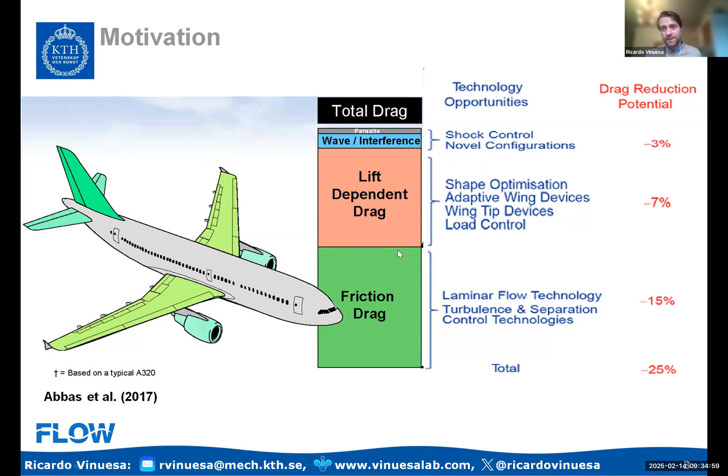And I also wanted to show some of the stuff that we do within AI for Science. We have a review paper now under review in Nature Computational Science, where we are trying to see how AI can be used for scientific discovery. And the take that we took in this review paper, Steve Brunton is also part of it, and many other authors worldwide, is basically to classify the applications by how much we know about the governing equations.

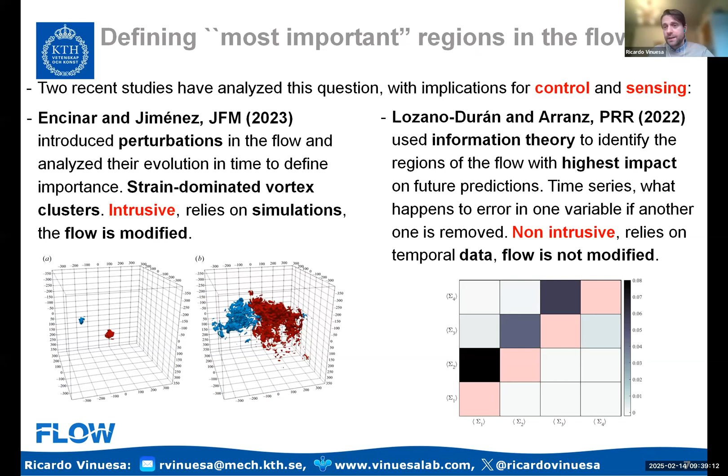What we want to talk about here is an alternative approach, which is based on deep learning. And this is intrusive on the surrogate model. We can really create a surrogate model and make our changes there such that we are not affecting the original trajectory. And one advantage of this is that it can also be applied to environments with limited data like experiments.

So we're going to start by analyzing a turbulent channel flow at a low Reynolds number. We're going to identify Reynolds stresses, so basically the Q events. These are regions, three-dimensional regions satisfying this equation, which means that the instantaneous product of the uv fluctuations needs to be larger than some threshold times the RMS of u times the RMS of v. Okay, so we basically want to look at volumes where the Reynolds shear stress is high, and that's the idea.

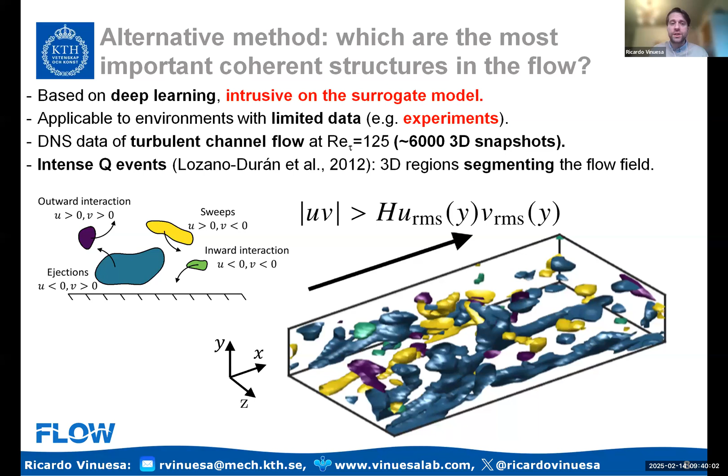And we want to classify this in terms of importance. So we want to look at if we build a predictive model, which can be a U-Net, for example. So with a U-Net, we can have the present state of the flow, which is given by the three-dimensional u, v, and w fluctuations. And then we can use this to integrate that in time and move it 5, 10 viscous times into the future.

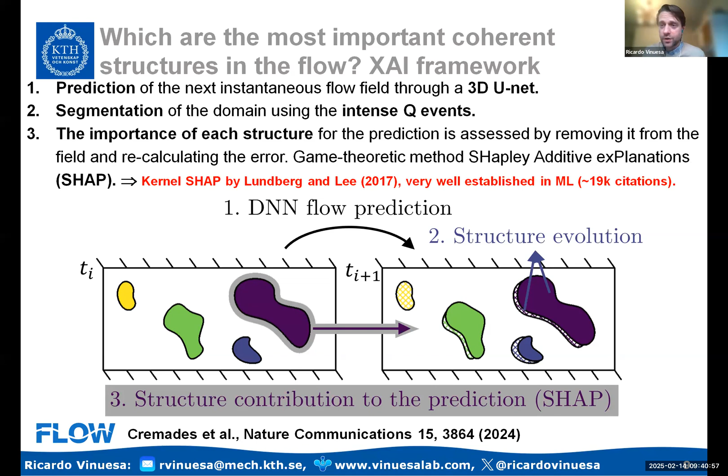Then using Shapley additive explanations, the SHAP framework, which is a game theoretic method, we can basically remove structures from the input, repeat the predictions, and see how that's affecting my error. And in this way, we can get a pretty objective way to measure the importance of each of those elements. This is work led by Andrés Cremades in my group. It was published last year in Nature Communications. You can find all the data and all the code available online.

So basically, if I go in a bit more detail, what I would do is that I have my present flow field, so the present instantaneous fluctuations. I use my U-Net to predict the future state of the flow. I have my prediction. I can compare that with the ground truth, which is the DNS, and I calculate my error. And the errors are very low. I mean, we have now models that give us less than 1%.

Then I go back to the input, I remove a structure, one of these Q events, and that removal is basically replacing by zero fluctuations, which is a non-informative field. I run my U-Net again, and I get a new predicted field, which I can compare with my ground truth, and the error will change. So naturally, some structures will affect that error more than others.

And in this way, we can create what is called a ranking of importance. Each of the structures will have an importance score, and this importance score is what we call the SHAP value. Okay, so this is how we can classify the different structures in terms of importance to make these predictions.

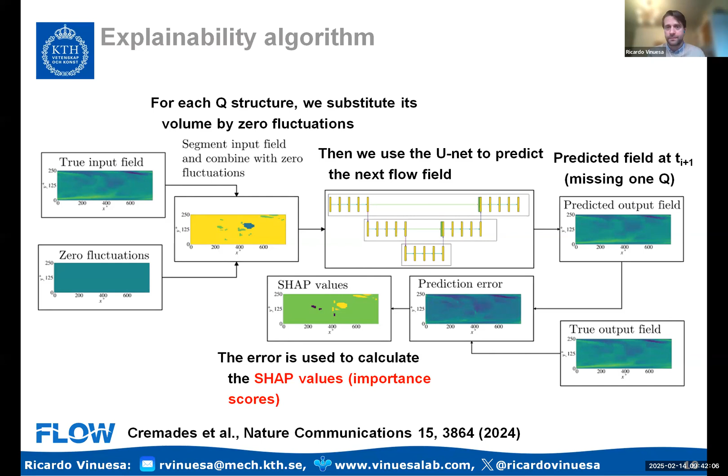Now, a little bit about the method. In fact, what this does is to create a linear model G, which you can see here. This linear model represents the error between the neural network and the ground truth. So it's a linear model of the error. This linear model is made up of a bunch of structures present in the flow.

So this Q1, Q2, Qn, this is a binary variable which takes the value of 1 if the structure is present or 0 if the structure is absent. And this phi, these are the SHAP values. These are the weighting factors which allow me to do a linear superposition of all the structures to create the linear model for the error.

Now, we can calculate those phi values using least squares regression. So as you can see at the bottom, we have this f hat, which is the real error between the neural network and the ground truth. And I want to minimize the difference with respect to G, which is the linear model of that error, which basically through least squares allows me to find the values of phi 1, phi 2, and phi n.

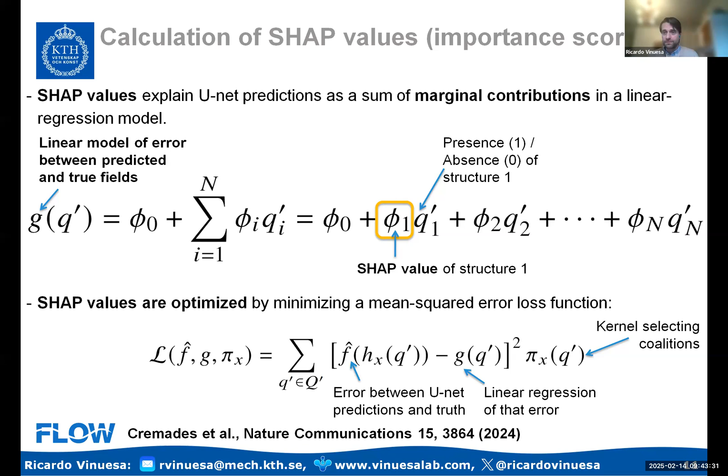This is done in a game theoretic way, where this kernel pi is essentially deciding the coalitions containing structures to make this assessment of the SHAP values. Now, two main assumptions that we are doing here. The first one is the fact that the model G is linear. So we are using a linear model to represent the error.

Is this fair in a turbulent flow, which is chaotic, nonlinear, highly complex? And the reality is that this linear model is actually pretty good. If you calculate the difference between the real error and the linear model of the error, that's a discrepancy of about 10 to the minus 7 for a quantity of order 1. There are so many structures, on the order of 150 per field, and we have thousands of fields, that the linear superposition of all those structures is enough to create a pretty good representation of the error. So the linear model is okay to represent the error.

And the second point, which perhaps is even more critical, is the fact that we're using an approach where we're removing structures one by one to represent the error in a system that is highly nonlinear and chaotic. The reality is that they're not exactly removed one by one. They are removed in what we call coalitions. So a coalition is a group of structures where our target structure is present.

So we remove it in that context, but then we consider a different coalition, and then we remove it in that different coalition. And each of these structures is evaluated in many different contexts, such that we can see their contribution to the error, close to the wall, farther away from the wall, in a way that we can mimic the interscale mechanisms present in turbulence. So results are very robust in terms of the number of coalitions to assess the error and the number of structures per coalition, such that we can have a pretty good

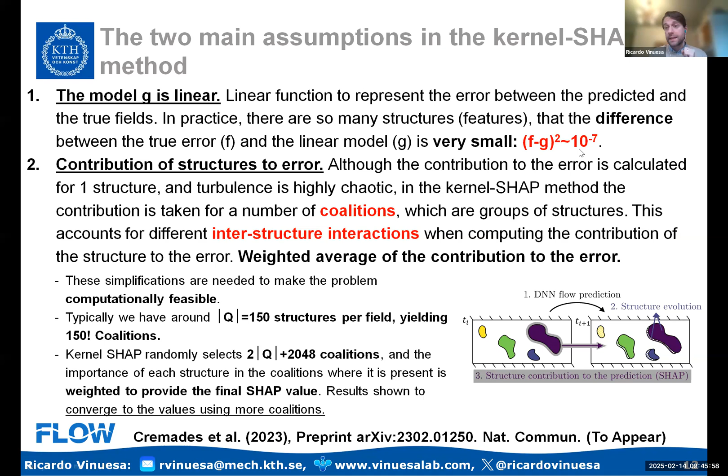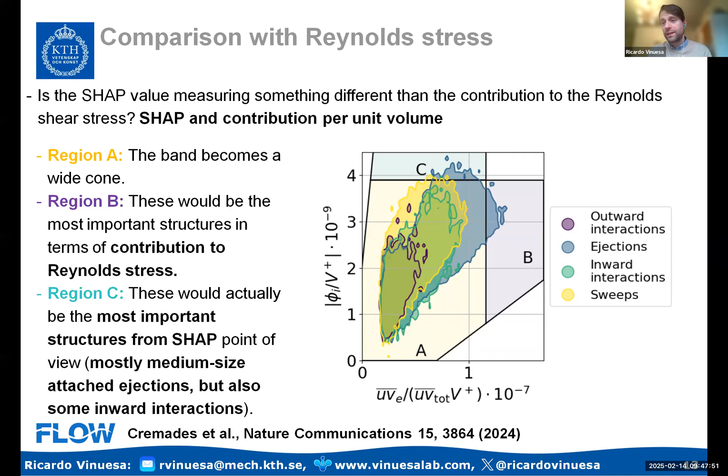So once again, this shows us that the most important Q events are not the ones with the highest Reynolds shear stress, which is a very meaningful conclusion when you are able to identify things purely based on importance. Okay, this was a very good conclusion that we had.

We also applied this to an experimental data set, because I mentioned at the beginning that one of the motivations of this work is to apply it to experiments. And to do this, we worked with Ivan Marusic's group in Melbourne. We looked at their towing tank experiment.

This is a very cool experiment where you have a plate and then you set the plate in motion such that the boundary layer grows in time, not really in space, but in time, as the vorticity perturbation introduced by the motion propagates downwards, that grows the boundary layer in time. And this is a set of PIV measurements, which is time resolved at a friction Reynolds number of over 1,000, which is an order of magnitude higher than the results before.

Now, why do I want to do it in experiments? This is for two reasons. The first one is the fact that the most important structures that I identify in my flow, they're identified in a nicely resolved DNS setting, but I might not be able to find those structures in a high Reynolds number setting, right? Because the experiment is done at a higher Reynolds number.

But second, even if I could do a DNS at the same Reynolds number as the experiment, I'm not going to be able to see in a 2D PIV plane with lower resolution, with some noise, the level of detail that I'm going to achieve in the DNS. So the point is not what are the most important structures in the flow. The point is, from whatever I can measure, what is the most important stuff?

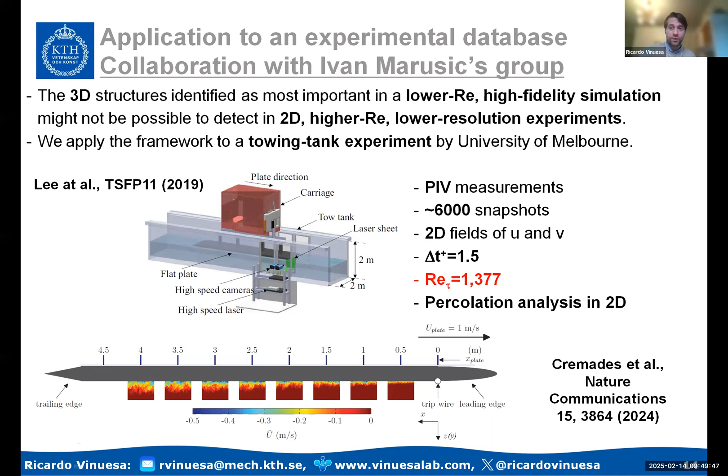Because what I can measure is what I can control, if you think about it, right? At the end, we always want to deploy these things experimentally. This is the real validation of these computational methods, if it actually works experimentally. So the question is not what is the most important structure in the flow. The question is, from whatever I can measure, what is the most important? And this is what we did.

We applied a variant of the SHAP method. This is what we call the Gradient SHAP. The Gradient SHAP was developed by Erion and others in Nature Machine Intelligence 4 years ago now. And with the Gradient SHAP, which is much more computationally efficient, we find an importance score for each of the channels. So basically, here we have two channels, the U and V fluctuations.

We get the norm of the importance, and we apply percolation analysis in the same way as we did with the Reynolds shear stress. So you can see here the RMS of the importance, and this H is basically a percolation hyperbolic hole threshold. So in a nutshell, we look at the regions which have high importance compared with the background importance of the field. So the regions that are really important.

If a certain region, like Y plus 15, has an underlying high average importance, then it will be more difficult to become a SHAP structure because you really need to have a very high level of importance compared to the average value. And that's kind of like the idea.

What I'm showing you here is an instantaneous flow field where in black, I'm showing you the Q events, the Reynolds stresses. In green, I'm showing you the SHAP structures. And you can see that there is some agreement. There's about 70% overlap, but there's not a full agreement, which again confirms the fact that the Q events don't tell you the whole story.

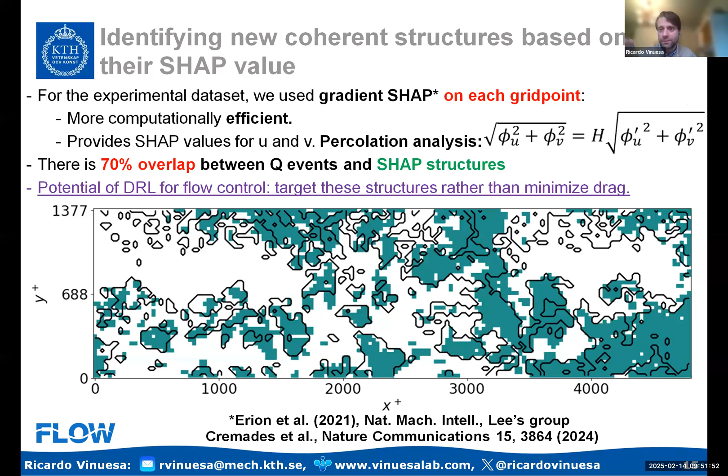Now, this is stuff that we are working on. This is an article that is currently under review in Nature Communications, again with Andrés Cremades and also with Sergio Hoyas. So what we did was the SHAP point by point in the DNS dataset and in a larger channel so that we can have a bigger domain.

So now our input is the instantaneous flow field, the instantaneous fluctuations, and we want to remove pixel by pixel data from the input to assess the importance of each of those pixels. And then what we will do is cluster the regions of highest importance and create new coherent structures completely based on importance. This is the cool part here.

Here I'm showing you for one instantaneous flow field the different types of extractors. On the top left panel, I'm showing you the SHAP structures. These are the ones purely based on importance. On the top right, I'm showing you the Q events. So these are basically structures based on Reynolds stress. On the bottom left, I'm showing you structures which are the streaks, the classical streaks. And on the bottom right, I'm showing you the vortices, the vortical motions, basically.

Now, if you just compare the instantaneous visualizations, the SHAP and the Q events share some similarities, but they also have some differences. And then the streaks and the vortices are a bit different. Now, keep in mind, historically, the streaks and the vortices are visualized. You can see them in the flow, right? Since the 70s, you are seeing streaks in the flow. Since much earlier, you can see vortices. But the fact that you can see them doesn't necessarily mean that they are important. It just means that they are there.

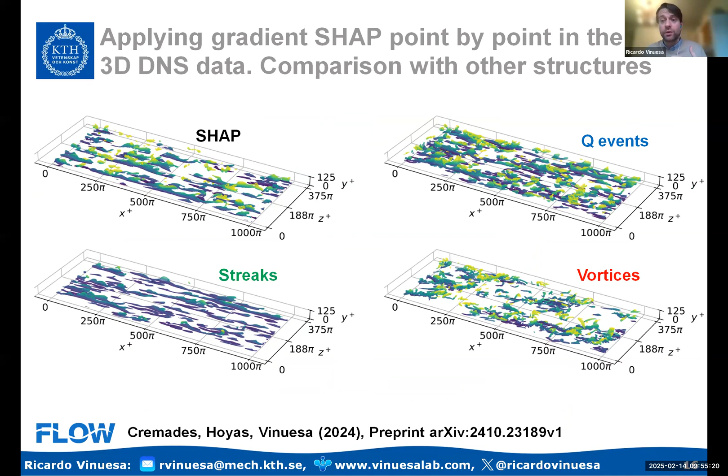Something even more interesting. This is the joint PDF. This is the probabilistic distributions. But what I can also do is take the instantaneous extractors that you can see here in one flow field, and look at the one-to-one agreement, the coincidence between different types of extractors, and then do statistics over the whole data set. So what we did was to precisely do that.

So the vortices, which you can see in the flow, they don't have so much importance in there. I mean, there is some agreement, but not so much. What this tells us is that the classically studied structures only paint a partial picture of wall-bounded turbulence. So the streaks are important, but only at y+ 15. The ejections are important, but only far from the wall. The sweeps are important, but only close to the wall. And none of them put together represents 100% of the SHAP.

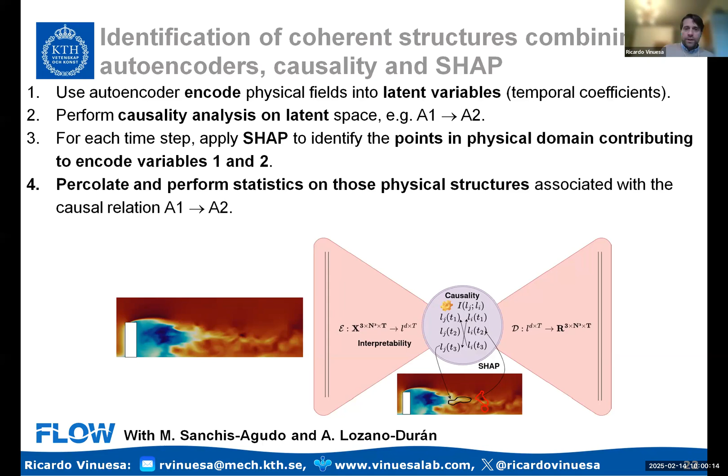Okay. And there are other questions that we are currently investigating using SHAP and explainable deep learning. For example, what are the most informative structures to predict the skin friction? This has implications for medical devices. I'm also looking at the structures most important for the different direct and inverse cascade mechanisms. What are the most informative structures to predict separation or to predict temperature fields? If I have a multi-phase flow, what are the most informative structures to predict bubble distributions or particle distributions?

We're also using SHAP together with diffusion models to do optimal sensor placement. So this is something that we have developed with Abhijit Biswas-Rao, who, by the way, is going to start in Michigan also in the fall. So he will continue his PhD there. And this is something in collaboration with several groups and also with Beverley McKeon in Stanford.

So the idea was to use diffusion models as a surrogate for reconstruction and using SHAP to identify the regions of the domain that are most important to do that reconstruction. So to do optimal sensor placement, to really select the subsets of my input mask to make the reconstruction.

So this is just a little menu of possible ideas to develop with SHAP. We're working on many of these things, and we believe that this is giving us a pretty robust, pretty strong way to assess turbulence phenomena in an objective manner, basically. Okay.

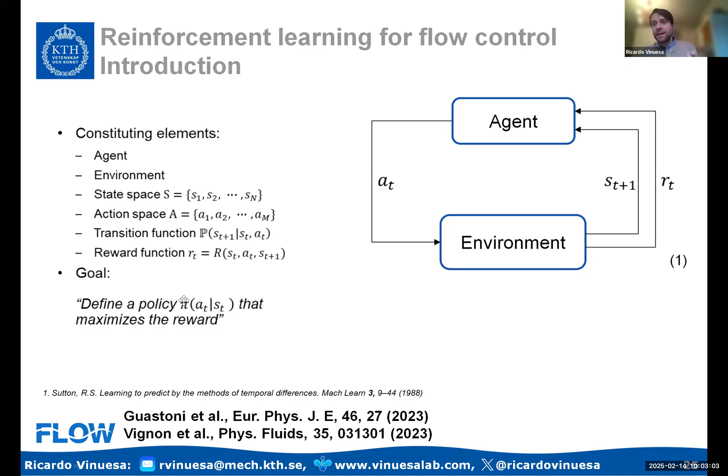The idea of reinforcement learning is to iteratively try different state-action relationships such that the reward is maximized. And that means that we want to optimize the policy pi, right? So the policy pi, given the state of the system, will tell me which actions to take to maximize the reward. Okay. And we're going to apply reinforcement learning for flow control in a turbulent open channel.

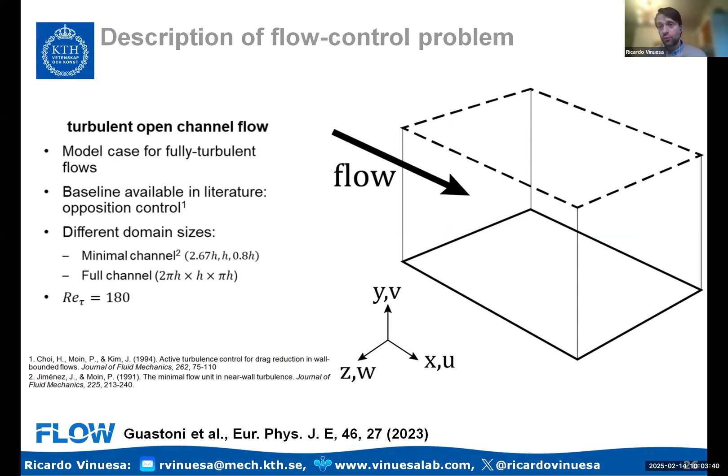This is at a low Reynolds number, Re_tau 180. We're going to consider a minimal channel first, and then we're going to consider a full channel. Okay? In the minimal channel, the physics is simplified. This is work that was led by Luca Guastoni a couple of years ago, who was a PhD student in my group. And he really did fantastic work in being able to implement the reinforcement learning with a CFD solver, because we're doing a DNS here.

And we want to compare with a measure of classical control, which would be opposition control. So opposition control was developed by Choi, Moin, and Kim. Well, this is now 30 years ago, right, from this paper. And opposition control has a very simple but very powerful idea. The idea is that you have your wall where you're going to actuate. You're going to measure the flow at a certain plane, which typically is y plus 15, so a sensing plane.

And in the sensing plane, you're going to measure the vertical fluctuations. So you're going to impose at the wall the opposite fluctuation. So when you have flow going up, you're going to impose suction. When you have flow going down, you're going to do blowing. And this simple idea actually works pretty well, especially at low Reynolds numbers. Then at high Reynolds numbers, the performance starts to degrade.

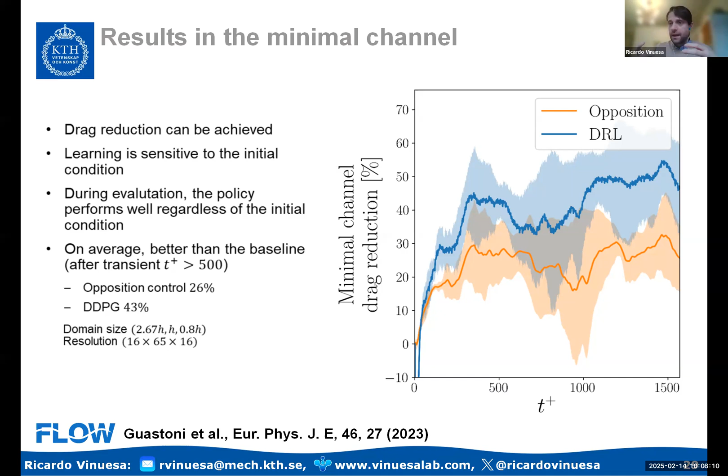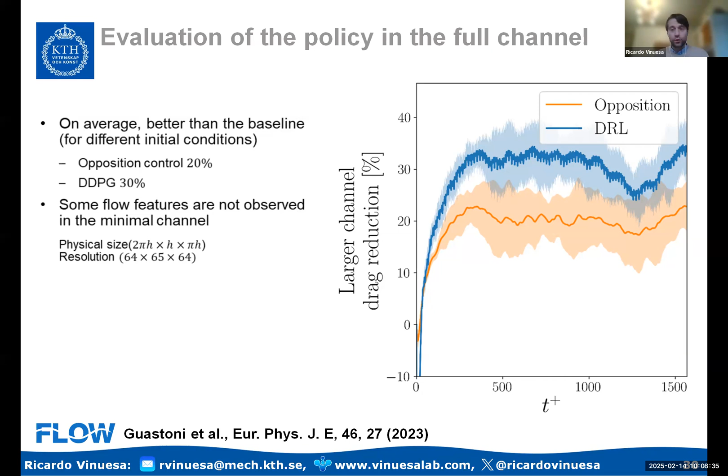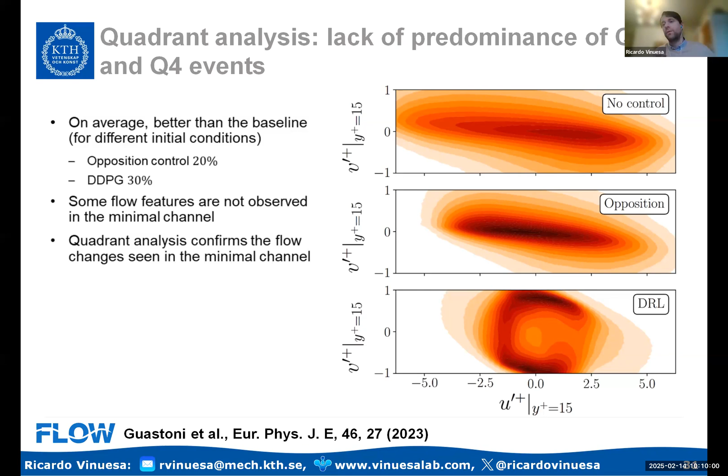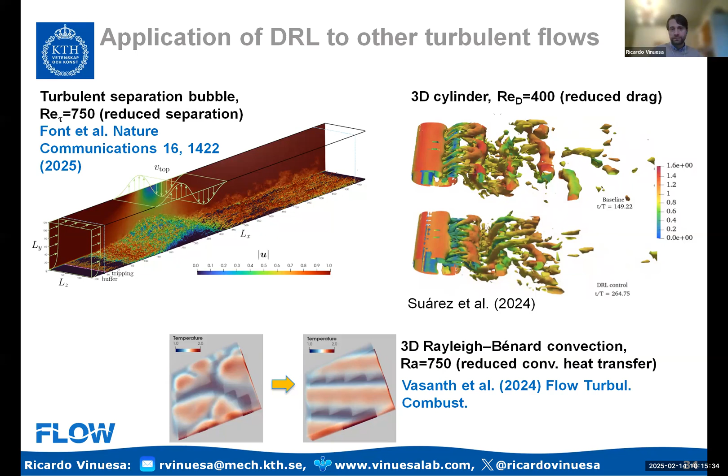A couple of additional points on the usage of reinforcement learning. We are also working on using reinforcement learning as a modeling tool, basically as a subgrid-scale model or even as a wall model, or both. The idea here is to use reinforcement learning to create a forcing, which is the subgrid-scale stress, where the reward is a spectrum. So we want to have the right spectrum for our flow, basically.

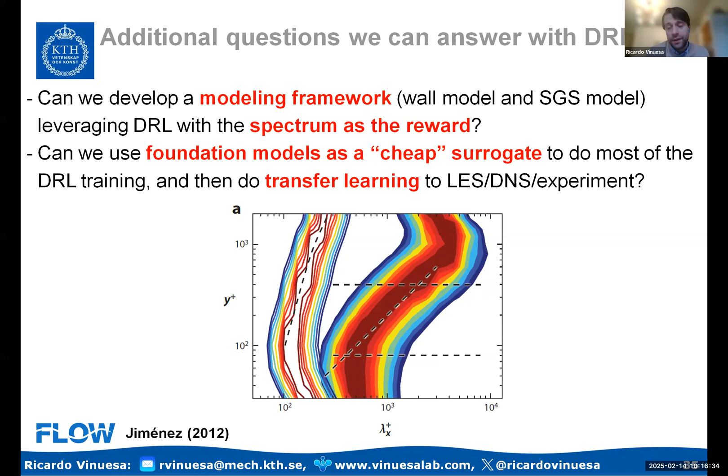And we're also working on ideas combining foundation models and reinforcement learning to have a pretty good surrogate to speed up the training. So if we can come up with a good way to develop a good surrogate model, then we can do most of the training with a cheaper surrogate, and then do transfer learning to more detailed and much more expensive simulations just to do the final tuning of the model. So these are two ideas that we're exploring, both pretty promising, just to show you that reinforcement learning can be used for more things in the context of turbulence beyond just flow control.

So as a summary of what I've been talking about today, we're using DNS, we're producing high quality data for aeronautical flows.

SHAP and explainability allow us to identify what are the most important structures in the flow and to identify essential causal links in our turbulent flow. In the third part, I've also talked about reinforcement learning. Reinforcement learning is significantly outperforming classical control methods, in particular when I combine reinforcement learning with explainability to target the SHAP structures, to target these most important structures in the field.

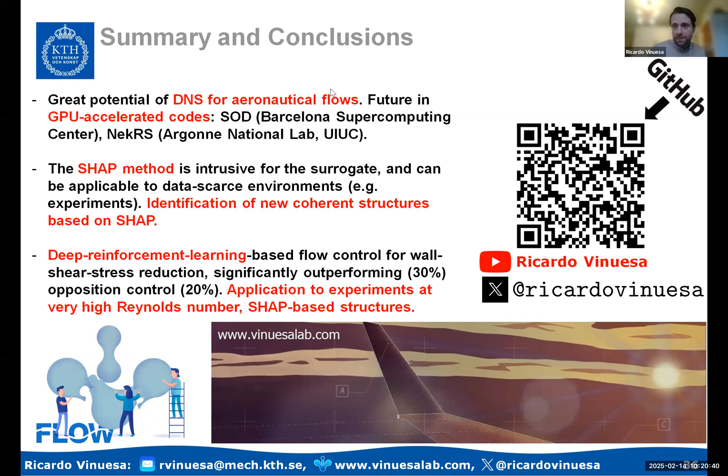Yeah, that's a very good question. The results with the SHAP and the reinforcement learning are very new. This is really ongoing. But to give you an idea, here we are just calculating the SHAP values for the uncontrolled case. But of course, as you control the flow, the most important things change. And as you increase the Reynolds number, the most important things change. Still, these results are without readapting, without retraining to the new conditions of the flow.

So in a way, this is using kind of a bit outdated information of what is important and what is not, and it still outperforms the other control methods. Now we're currently working on dynamically adjusting the SHAP and the reinforcement learning. So as I control the flow and the flow becomes different, it goes in a different trajectory, we adapt what is the most important stuff along this trajectory, and the same with the higher Reynolds number.

Although I should say that comparing our numerical results below Re_tau 1000 with experimental ones beyond Re_tau 1000, the characteristics of the most important structures are actually pretty similar. The PDFs are very similar. But this is an area of investigation. If we go to Re_tau of 10,000 or 20,000, then we will have to do this a bit more carefully. But for now, it's actually working pretty well, and we are planning on incorporating this dynamic adaptation of the SHAP.

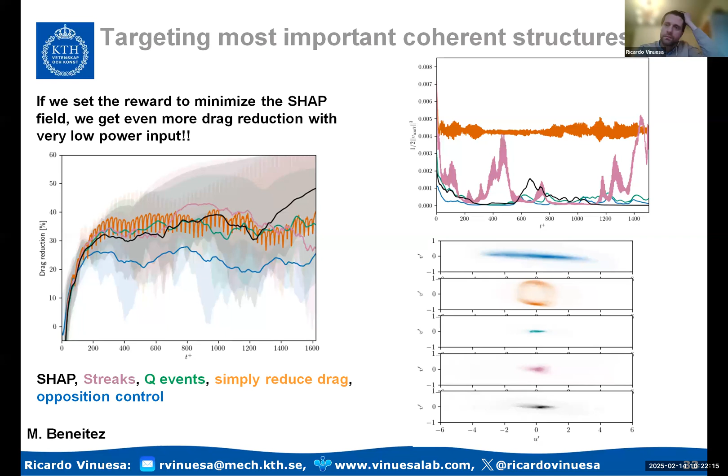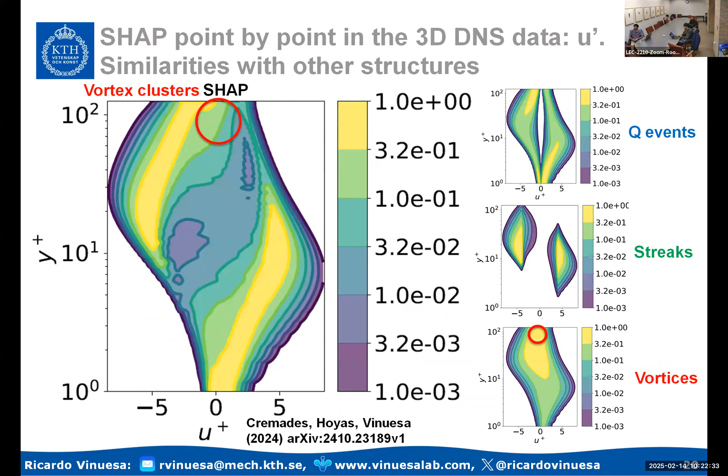I have two questions. So for the first question, it's related to slide 21, where you were showing the coincidences between the SHAP structures and all of the other flow features. So what I was wondering is that the SHAP method is an approximation, right? So any structures it identifies, I don't think it's guaranteed that that covers all of the important structures that exist.

So would it be possible to repeat this sort of plot, but do a comparison of two different SHAP methods so that potentially you could identify even more important structures and account for all of them in the subsequent reinforcement learning? Well, we have re-evaluated the SHAP several times with different coalitions and different combinations, and the results are the same. So we find the same regions of importance, basically.

Because the U-Net, I mean, I have my input, I have my output, that's it. If I have a probabilistic method, like a diffusion model, then things are more complicated. And then, for example, for the optimal sensor placement, where we combine the SHAP and the diffusion model, the probabilistic aspect to it makes it that you need to reevaluate a few times, so you actually get all the possible combinations.

In that case, you're right, if the model is probabilistic, and that's what we have done for the optimal sensor placement case. But in this case, there's no probabilistic aspect, right? You have your input, and the U-Net evaluates and gives you your output, basically. Okay, that makes sense. But it's a good point, actually. Yeah. Okay. And then I had just one more question, which is a little more stupid.

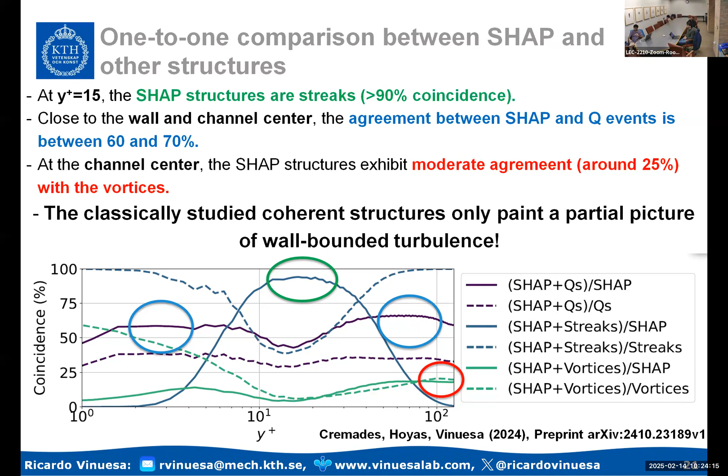So for the multi-agent reinforcement learning, I was curious as to how you define the reward function. So is it something that's common for all of the agents, or every agent has its own reward function? I mentioned it a bit briefly. In this example, when the reward is the wall shear stress, because you saw later on that I use the SHAP and other possibilities for the reward, but when the reward is the wall shear stress reduction, what I have is, maybe I can draw, yeah.

So if I'm looking at this pseudo environment over here, the reward is defined for a region overlapping with the neighboring pseudo environments, so something like this. Okay. So the drag reduction in a region, something like this. Why? Because I want to have local information for that pseudo environment, but also I want to see how the overlap with other pseudo environments allows them to cooperate, right?

Because the parameters of the MLP, at the end it's an MLP, in all those pseudo environments are the same. So they are all seeing the different parts of the reward, but with overlaps. So they can actually work together. So the cooperative aspect comes with that overlap of the region where the reward is defined. Okay. And then how many agents do you need to set up so that the state space also becomes tractable for every individual agent, for at least this example?

Yeah, the limitation here is computational, of course, right? In this particular case, when we do the minimal channel, this is a pretty reasonable depiction. These were 16. So in the minimal channel, each pseudo environment has basically one grid point, and that grid point is an actuator, right? Blowing or suction. When we go to the full channel, then one needs to put several grid points, several actuators in the same pseudo environment. And in the pseudo environment, there is only one action coming, so all of them are doing the same.

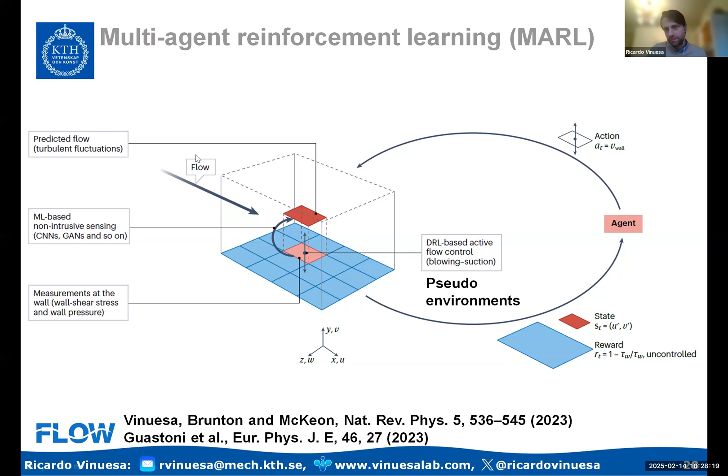So are you asking about the optimal sensor placement problem? Yes. So let me go there. That was the slide at the end of the SHAP. You're asking about this one, right? Yes. That's a good question, but for this particular problem, the motivation is an urban environment. So you have a city where you want to measure in different locations, and from those measurements you want to reconstruct the flow field. Our approach here is that the sensor locations are fixed.

So we don't want to move the sensors. There's other approaches where you could have drones and dynamically change the drone locations to optimally sense the flow, but we are not doing that. That's something that we are doing in another project, but I'm not talking about it here. Here I'm talking about static sensors.

So for each snapshot, I would get a distribution of the SHAP. What I'm showing you here is the time average over the whole data set, basically. So these are statistically the locations that are optimal to reconstruct the flow. And of course, as the vortices are going forward in the wake, in some cases this distribution is not going to be optimal, but statistically, this is going to be the most optimal. So yes, this has a computational overhead. That's why we want to do it only once and leave the sensors fixed.

But if you use this sort of approach for a problem where you want to adapt this, do you have any thoughts on the computational overhead? Yeah, so for the problem where we want to adapt them, with the drones, for example, then we probably would not use SHAP, because SHAP is quite expensive, relatively speaking, in terms of the number of evaluations that you need to do. This relies on a diffusion model, and the diffusion model is also not cheap. I mean, the evaluation of the model is cheap.